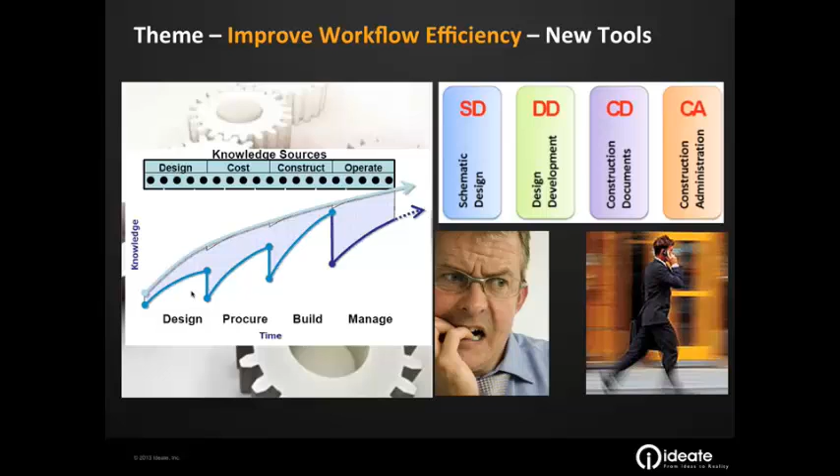So the notion is how to improve workflow efficiency in the work you do right now. Right now firms are struggling with how to connect all the dots in their workflow. Probably your current workflow has several different products. Maybe you're using SketchUp for your early part of the design. Maybe you have issues about how to take care of early marketing stuff that you have to do, and then how does it work in the field. We'll be talking about those kind of items today.

As part of the 2014 suites, Autodesk has added additional products. This is a PDF from the Autodesk website with some modifications. I cut off the suites that don't deal with the AEC industry, and specifically I'll be talking about two additional products that come in.

As part of the Building Design Suite, which is probably what most of you have, you get two products I've highlighted in red: Autodesk ReCap and Autodesk InfraWorks. If you have Infrastructure Design Suite, you get them in another kind of package. These all come as part of the subscription and suite work you do.

So the first key takeaway is, how many of you understand that you have an Autodesk login that you use? Everybody know that? Some don't. Every user can either get an Autodesk login or have one already.

A lot of what I'm going to be talking about has either a cloud-based element or a file storage area, and the place to get this information and deposit it is through Autodesk 360. There is no cost to you. They take a relatively minimal amount of information, and that gets you the sign-in portion of it. So if you don't have a login, it's probably best to get one today.

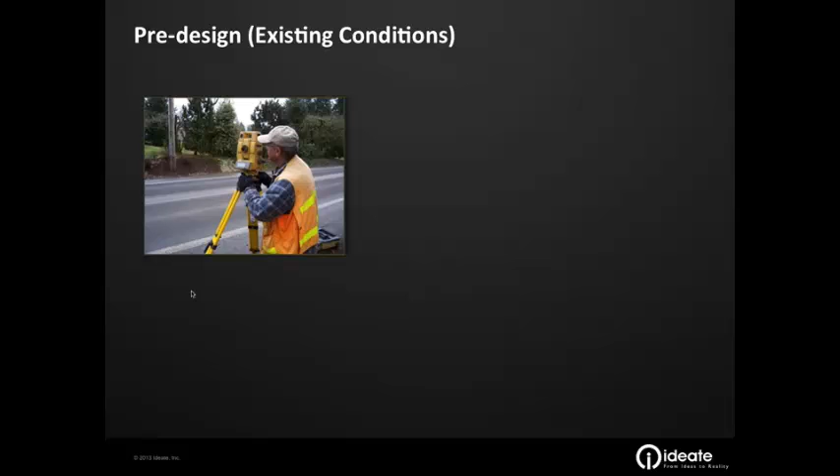Some of you may be waiting for a surveyor to do the work for you, meaning you wait till the surveyor gives you all the work, and maybe use SketchUp or hand drawings, then when you get the survey information, bring that into Revit and move forward. Maybe some of you are using a tape measure and existing scenarios, and for those of us over a certain age, maybe you're putting that information on in red lines and trying to transfer it over.

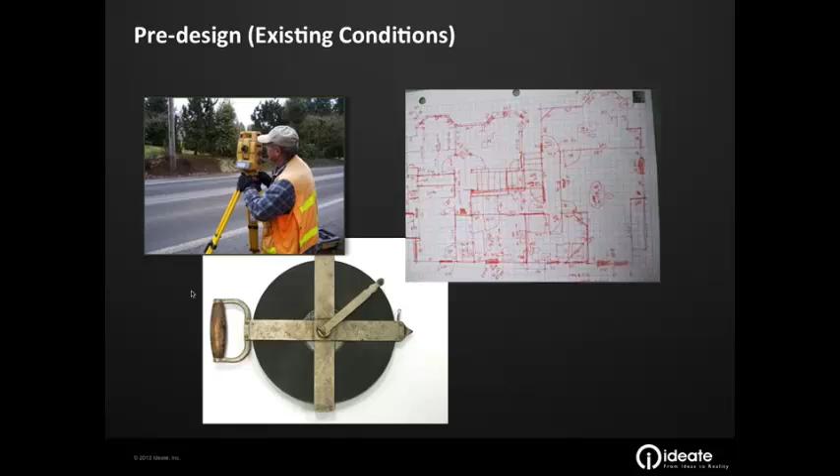That's a fairly inefficient workflow overall, because it doesn't allow you to carry that data forward easily and well.

So Autodesk has looked at that and said, let's see how we can help customers communicate and visualize better in the existing context they have.

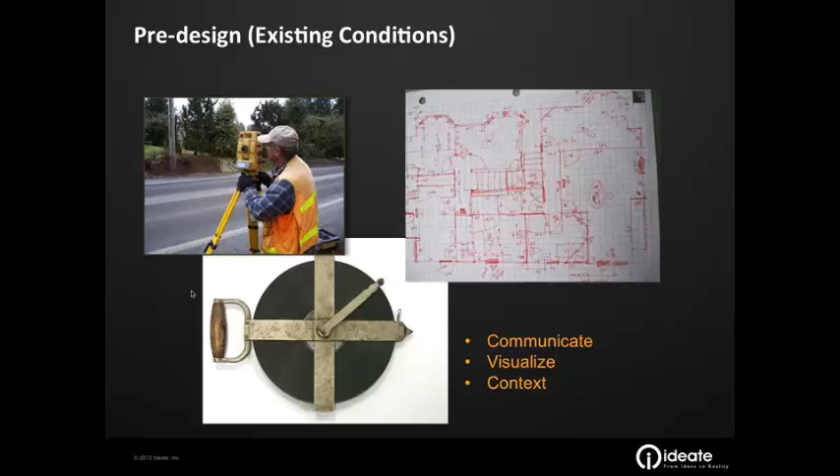A product that has just come out as part of your subscription benefits, and some are free, is called Autodesk ReCap. Autodesk bought this technology about a year ago. They've included it in Revit to help with scan data coming in, but there are some other additional benefits I want to talk about, because not everybody's going to get scan data.

We're going to talk about two aspects: the scan data and items you don't need with scans. The part that is ReCap Photo is where you can use your digital camera to take pictures of a project or site and then bring that scan data in directly without the use of a third-party vendor. I've got a short video, about 2 or 3 minutes, done by Autodesk that illustrates this process in the photo way.

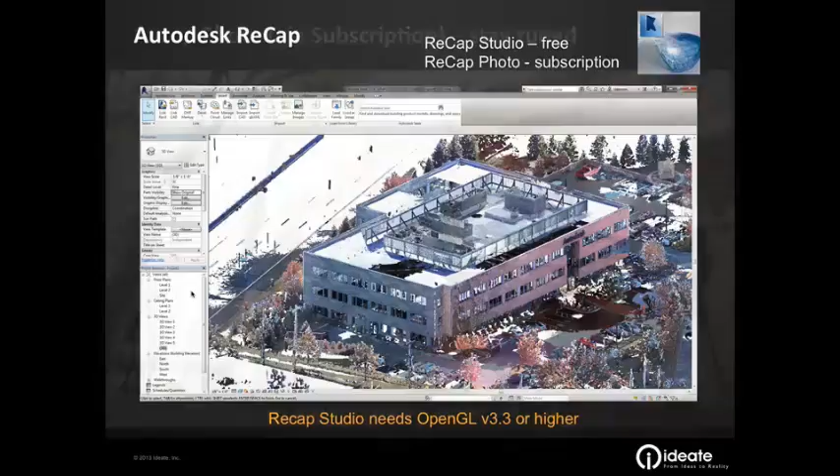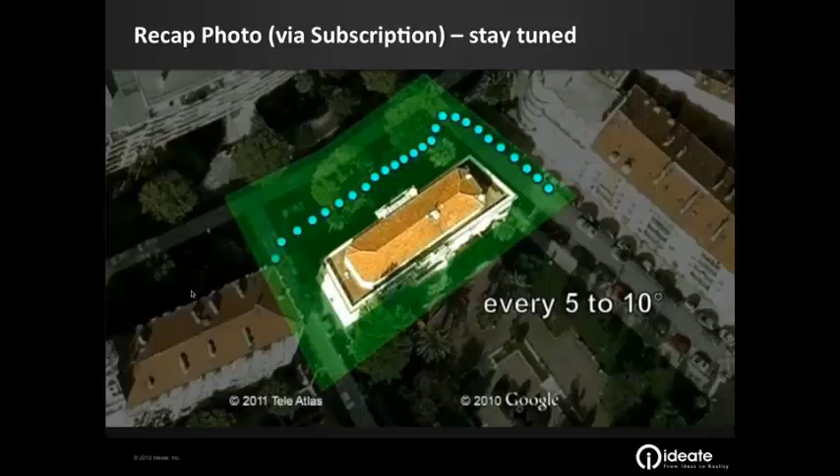In the case of a building, a first recommendation is to schedule your shot using a Google Earth view. This will help to check the possibility to access the various viewpoints. You'll need to take a picture every 5 to 10 degrees roughly, so about 40 to 50 pictures if you want to get the full 360 degrees of the building.

Shooting from street level, make sure to select the right spots. Avoid shooting with moving objects in front, or foreground trees that would hide your building. Be careful also to avoid underexposed or overexposed photos. Do not zoom in too much. The best camera for street-level pictures is a digital SLR equipped with a wide-angle lens. A 10mm lens is a perfect tool.

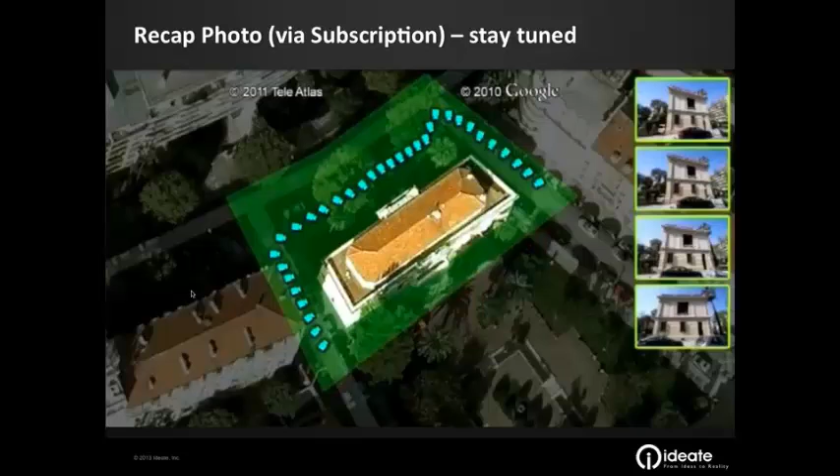You can then simply walk around and stop every few meters to shoot the pictures. When moving around, make sure to shoot enough pictures to ensure a good overlap between each picture. Autodesk ReCap Photo will do a good job if there's good visual continuity between each viewpoint. It's always better if you can capture most of the building in each photo. If you have the chance to shoot additional pictures from high viewpoints, such as from neighboring buildings, please do.

If you use a compact camera, you can artificially create wide-angle viewpoints as well. In every location where you stand, simply rotate the camera around yourself, shooting several overlapping photos to simulate a wide-angle lens to cover the entire building from each location. Make sure that the photos you shoot from each standing point overlap by at least 50%.

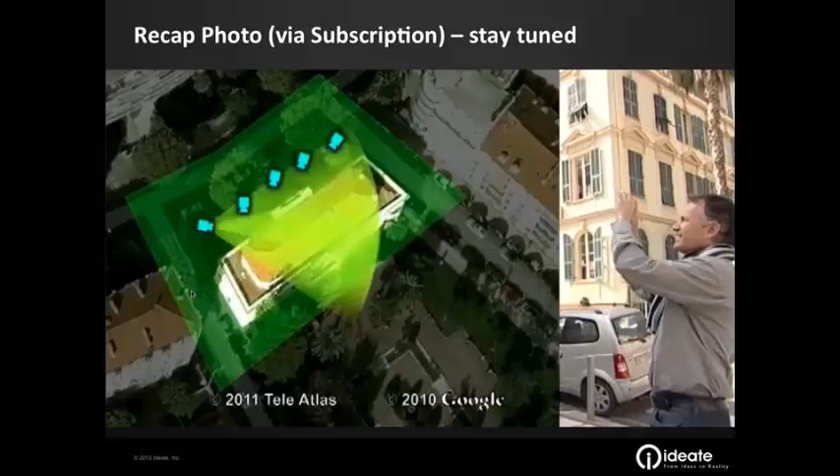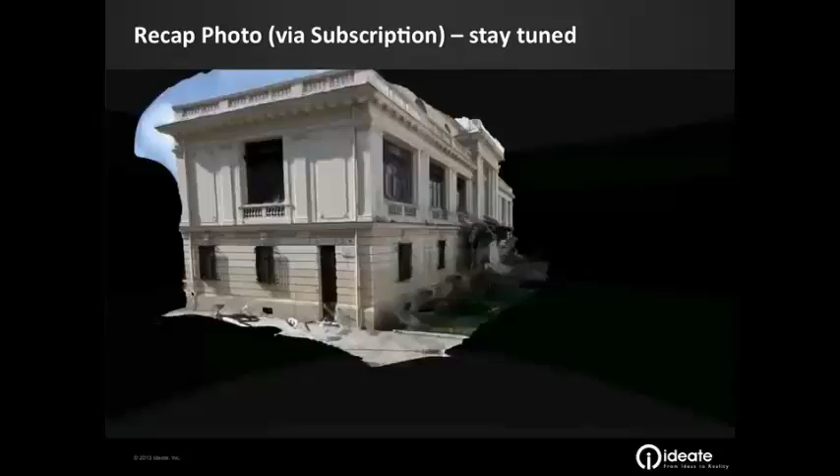ReCap Photo will then create the photo-textured 3D model for you. You can add close-ups if you want to get more details on some interesting parts of the building. In this case, shoot again several pictures around these parts. The computed 3D geometry will have a higher density in such parts.

One last step: don't forget to measure one or several reference distances if you want to further scale your 3D scene inside ReCap Photo. Thanks for using Autodesk ReCap Photo.

So what that video shows you is that you'll be able to take either a DSLR camera or just your iPhone or a pocket camera and take pictures of existing conditions. That doesn't necessarily mean it's only for existing buildings. It could be infill projects where you're trying to understand what the buildings are on each side, or maybe you're doing a remodeling. So you've got several options.

Yes? So this looks like 123D Catch, except it's via subscription. Is it better than 123D Catch? So the question was, it looks like it's similar to 123D Catch, and is it better than that?

It has some elements that are, but the benefit comes near the end. When I get to the next slide you'll hear a little more, in which I'm going to be able to take that scan data and bring it into another editor piece that allows me to call up and edit the scan data and get it down to the right amount of stuff.

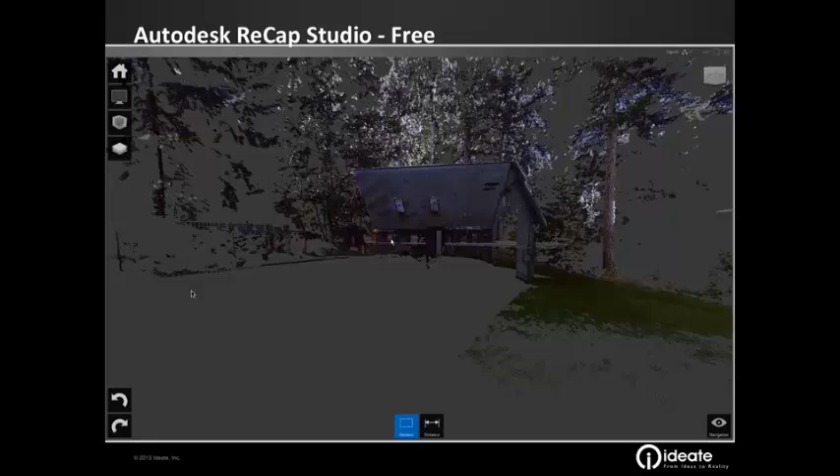There's many others. The other part of this is the Studio piece, in which I'm going to be able to bring that scan data, whether it comes from this photo method or from Leica survey information - doesn't matter which way I get it. I can bring it in. This is an actual scan data item done with Leica and brought into ReCap Studio. It allows me to quickly put it all together, because usually there's multiple files when you deal with Leica data, in the same way as the multiple JPGs you have through the photo side.

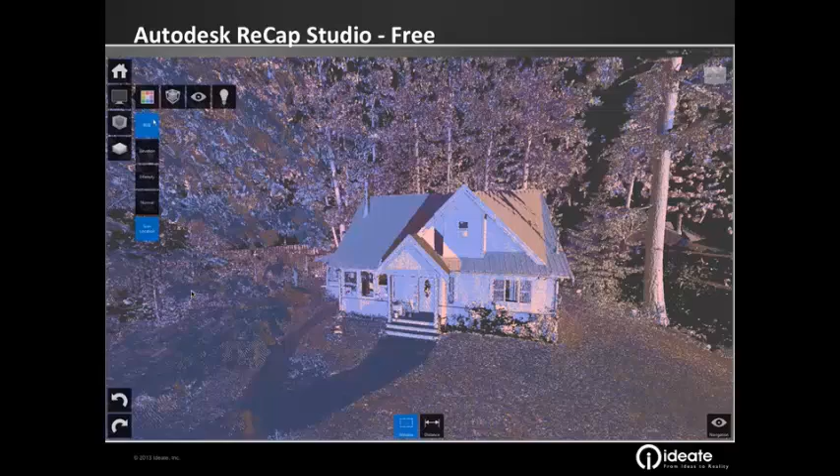Then I'm also able to come in and do some inquiry. What I mean is we're going to be able to do some scanned measurements, so I can see if I've measured that to be a certain distance in the field, does it equal? It gets to validate the information.

In this particular case, it gives me some information. I don't know if any of you have done a residential remodel and wondered about the roof pitch. Had that on my own house. Here's an example where I could have scanned it and it would have told me this roof is a 12 and 12 roof. So if I wanted to extend that porch, I now know the pitch data is 12 and 12 without having to scramble up on the roof.

So you get to do a lot of inquiry upon the scan data to see if it works for you. You also get an opportunity to add notes, so it can actually embed notes like 'please check this dimension again.' But one of the key benefits I've seen in ReCap Studio is the ability to get rid of the scanned information that you no longer need.

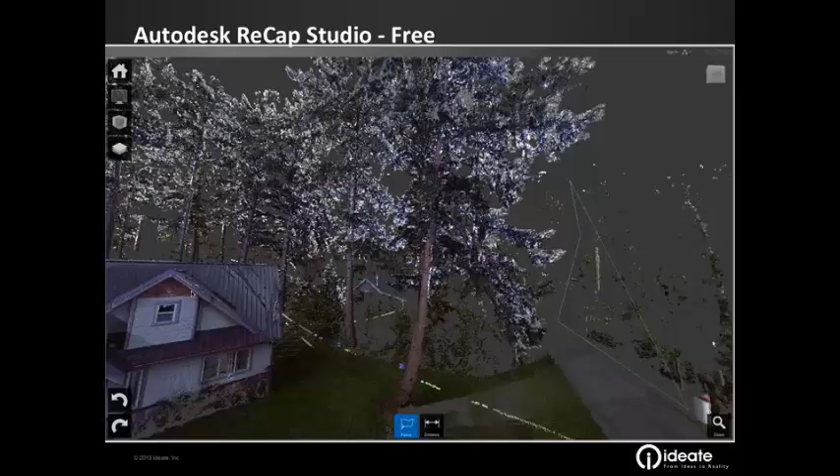In this case, we're using what I call desktop publishing, or Photoshop-like editing, where I'm lassoing this portion of the scan data, which is on the neighbor's property, and I can just get rid of it. So it reduces the size. Maybe I want the trees, maybe I don't want the trees. I can come in and cut and leave in what I want.

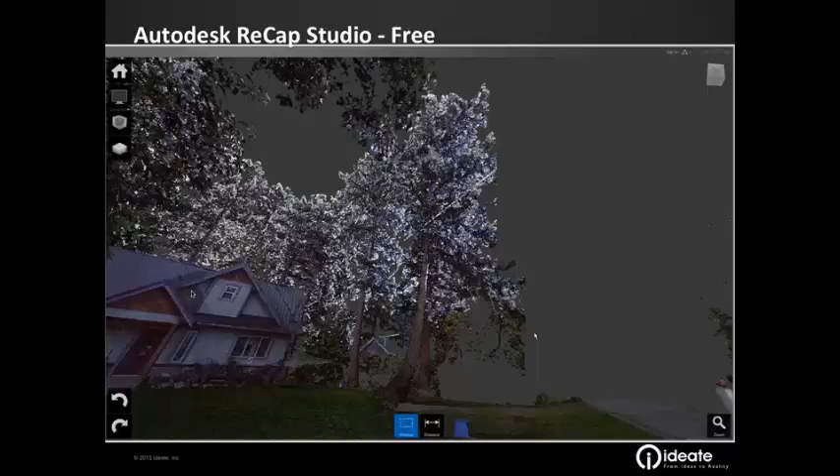I'll show you the workflow in just a second, how that would work. So the key takeaway about this technology is you get to deal with point cloud information without scanning, and if you do have scanning, you get to do the post-processing in a better way.

All right, let's talk for a second about the workflow of how to get that information from ReCap, that scanned information, into Revit, which is where I want to be doing my work. This is a screen capture from ReCap, and as you can see, I've highlighted the blue export, and now I save it out in the file format to the RCP format.

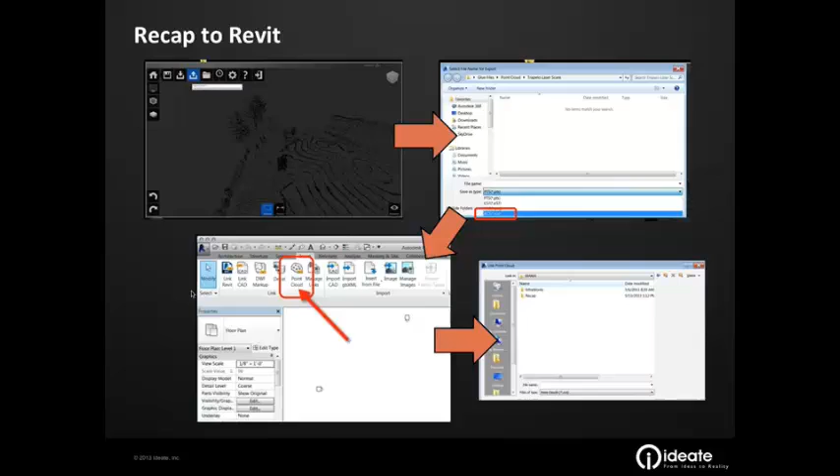In Revit, it's simply insert point cloud, and that brings up this dialog box, and in the drop-down it also has RCP. So then I bring it into Revit, and I can work from it there. It's a very easy workflow, and the key benefit is that you're able to take existing conditions and bring them into Revit, and that data continues to live in a very easy methodology.

Any questions about ReCap that I can answer? Yes, ma'am. How accurate is it?

Oh, it's taking from point data. So in ReCap Studio, you've got to be fairly specific about where you press the button, so you'd have to zoom in to find that corner of those two posts. But it would be a good way of validating some information.

I don't know if you've ever done field measurements and thought, I wish I would have taken that piece of information, and you didn't. What do you have to do then? Go back out to the site. And what do we do if we can't go back out to the site? We assume -- I say fake it, but assume's better. And does that assumption usually come back to bite us later on? Nah, never. So this is a way to validate it.

I wouldn't use it in lieu of a key measurement. So if you knew those posts had to be 8 feet apart, I'd probably still take the field measurement. It's still going to be better.

Yes, sir? What kind of point data files do you accept? As far as point data, there's a lot of different Leica and that kind of information that goes into it. It has to be brought in and then changed over to an RCP. The reason is that's the technology Autodesk purchased that allows us, when we take it into Revit, to rotate it nicely. If you've used previous scan data in Revit, you've noticed it's been -- can I use the word clunky and get by with that phrase? Very clunky and hard to use. So they bought the technology which takes the scan data and processes it in a better way, so it's a different file extension. But you'll be able to put your existing scan data into ReCap Studio and then create an RCP file from there.

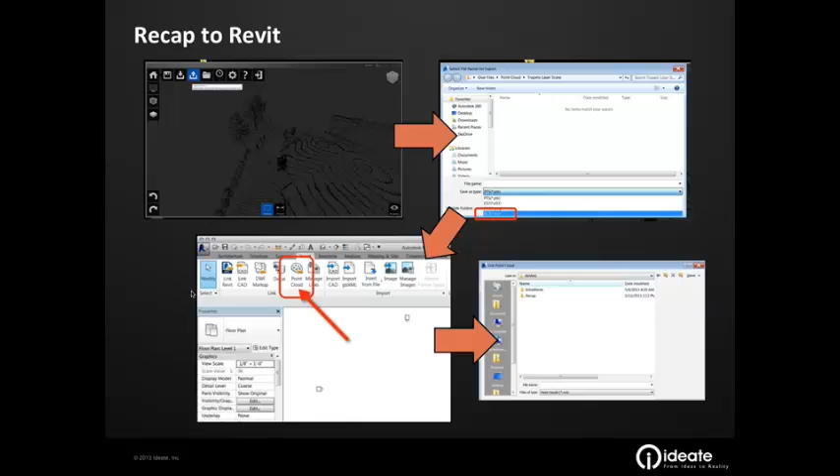All right, so let's talk about the next piece of the pre-design work, which I'm calling contextual storytelling. That's a big word that really means there are times in the pre-design work where we in the design industry must explain to others - stakeholders is the word that gets used. Stakeholders is anybody that's interested in the project, whether they have knowledge of design work or not - planning commissions, neighborhood groups, a whole bunch of things. And right now, this is kind of the workflow.

We go and take sketches and stand in front of groups, and we may have angry neighbors telling us no, no, no, and we're trying to explain our design maybe in a rendering, maybe in plans, maybe through words. All of those processes can have their problems, because I think we'd all agree, if we step aside for a moment, that most of the world doesn't understand architectural drawings.

They may like the colors, they may look at the rendering and say how nice, but they don't understand how it sits. So the common question I used to get in planning commissions is, how is your building going to look from my bedroom window? Anybody get that question or a variation thereof? I see some smiles, so you've all had that once. And how do you answer that question? Oh, it'll look great.

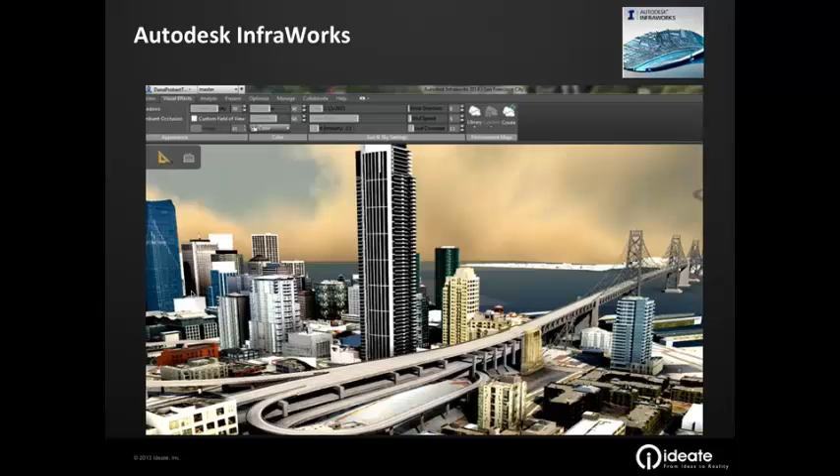It's called Autodesk InfraWorks. It's included as part of your suites under the Ultimate edition. What it does best is provide contextual storytelling, with the additional ability of adding data to a model. That data could be anything from population density in the area you're dealing with to locations of significant infrastructure, such as hospitals or schools. When you're dealing with how close a development is to schools, you can add these other data sources in and create a story that's easy to understand by anybody.

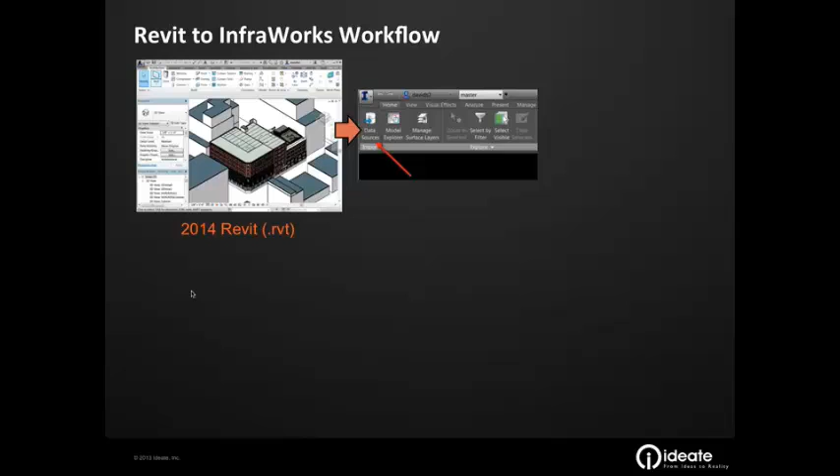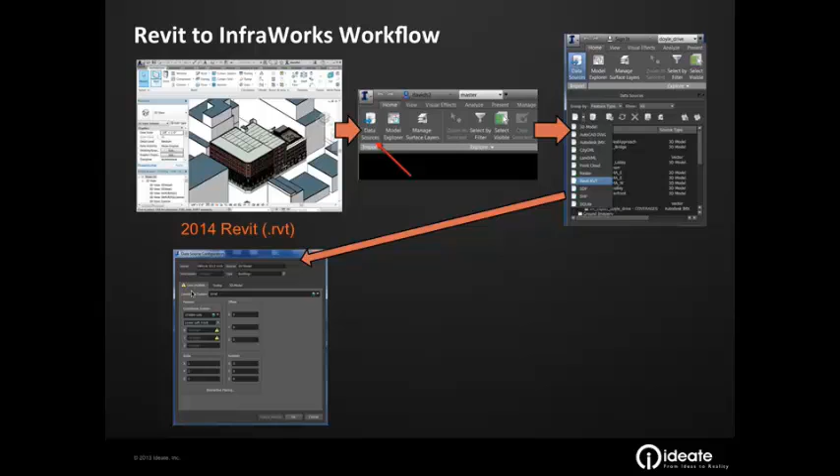Let's talk about the workflow. This works with 2014 Revit RVT files. In InfraWorks, you just click on the data source and you're able to add a Revit RVT directly. You place it, and then you can take this Revit RVT file and put it into InfraWorks. So the question becomes, how does that happen?

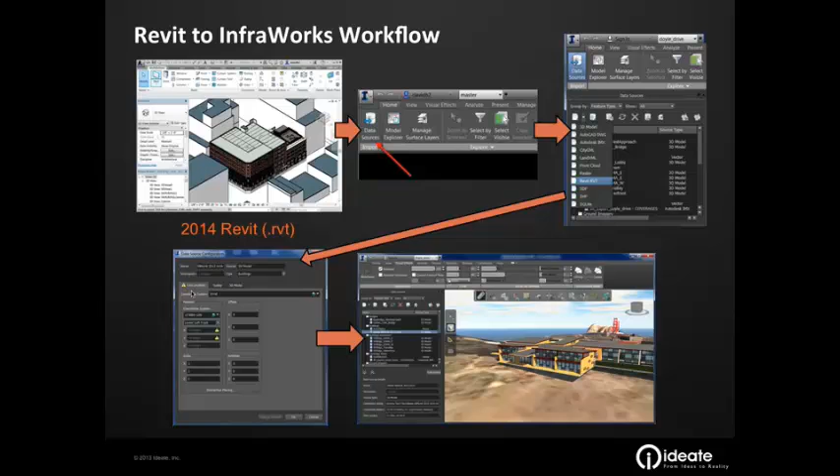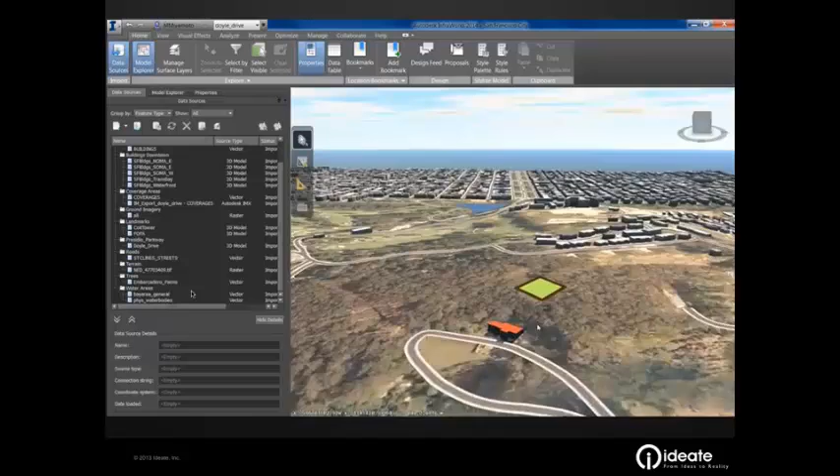This is a quick example of the city of San Francisco, modeled up by Autodesk from a lot of different sources. You wouldn't need to model this big of a city. The workflow goes like this: I've got a project, I'm putting it on this site near the bay, and I want to see how the site looks when I add my Revit model, and what I can see from it. So we're working through the process of attaching the Revit model.

We get to place it dynamically in this particular example. In fact, here's scan data I had before, so you can also bring in scan data additionally.

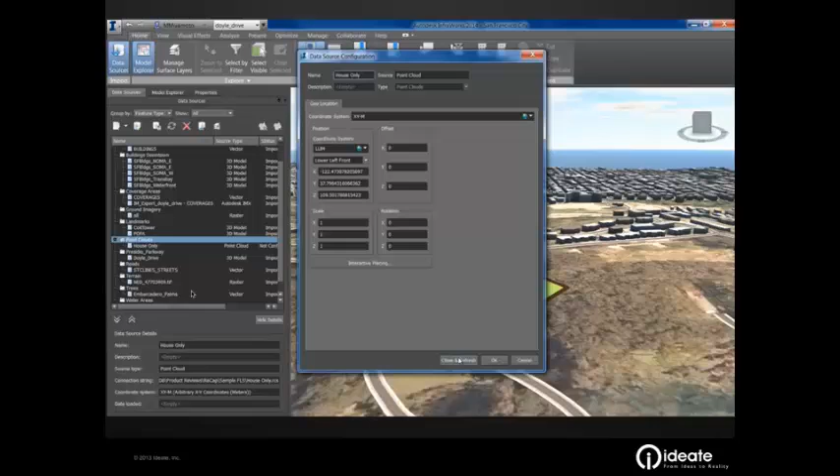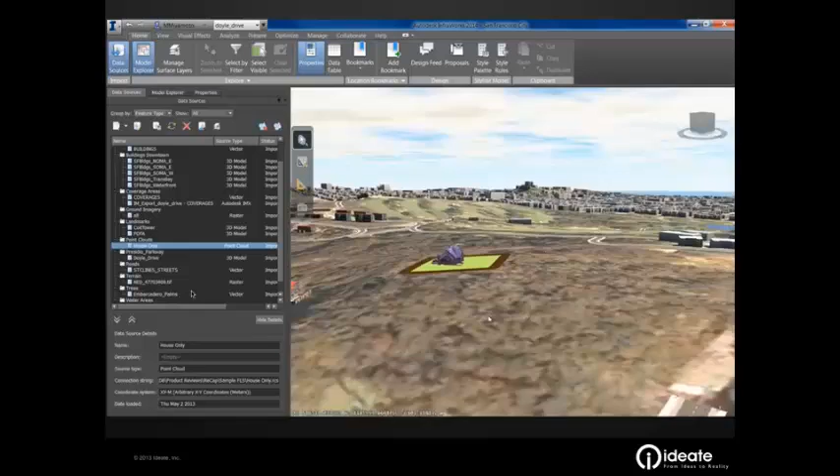And so it places it, and now imagine if you were one of the stakeholders—maybe the owner, or maybe the historical preservation company or district involved in this. How would that project look, and what could I see from it? I've been able to take scan data, bring it into InfraWorks, take existing data including Google Maps and other sources, bring it in, and now talk about it in a way that stakeholders can really understand very simply. It's part of your suites right now, and you're able to use it.

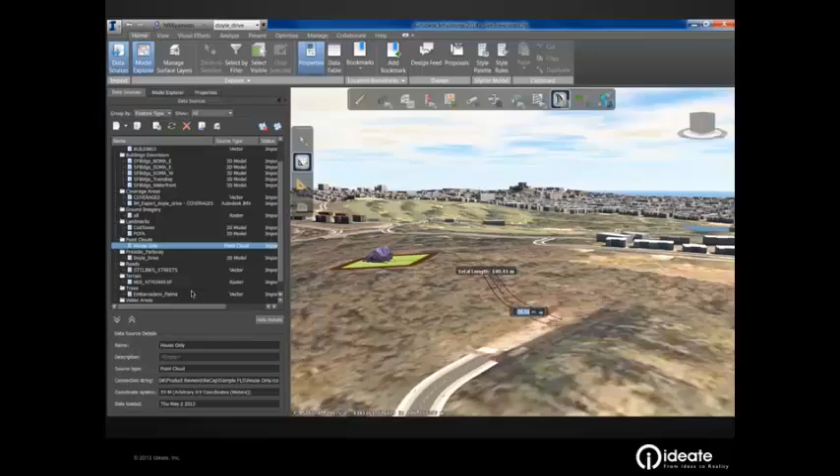Additionally, I have my iPad here, which I'll use later on. InfraWorks is part of the apps included on the iPad, so now I can actually take it out to neighborhood groups, present it in front of smaller neighborhood groups, and start to show it.

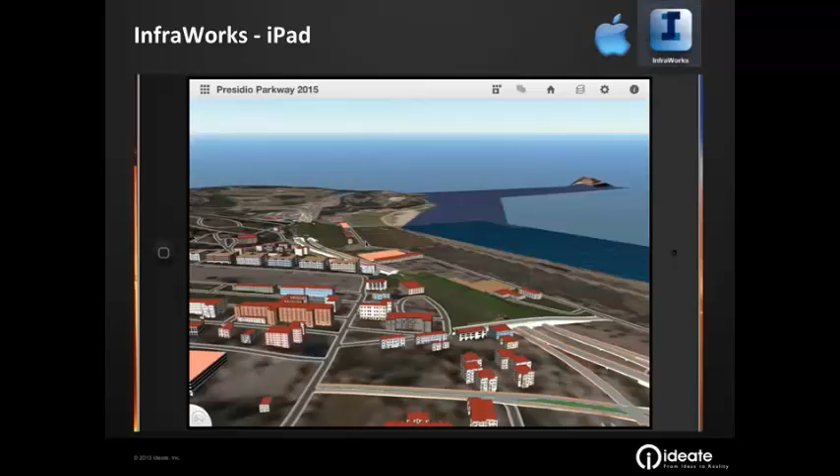So the key takeaway about storytelling here for users interested in InfraWorks is it has several key aspects that I think are really important. It allows you to get design feed input, so you can get stakeholder input—similar to a meetup, where you put some questions out. Here, the neighbors can actually tell you what their problems are earlier in the process. You can do multiple proposals, and you can also get more than one data source.

Any questions about InfraWorks that you might have? It's an interesting technology, but it's not for every firm. It's for firms dealing with urban planning or projects that involve a lot of stakeholder input. It's a technology I invite you to start looking at.

Now let's go to the other bracketed end of this, and let's talk about post-design. This is where I think the most exciting work is being done. How presently is your post-design work being done? When you go out to the job site and have questions from the contractor, do you have them scribbled on a page, taking a big roll of drawings out there, then running back to the office hoping somebody can...

...deal with them. Autodesk has looked at this, and again it comes back to the three issues of communication, visualization, and collaboration. There's a methodology where tablets are being used presently on job sites, and how can the information we create in the pre-design and design phase and working drawing stage be pushed out to the post-design phase.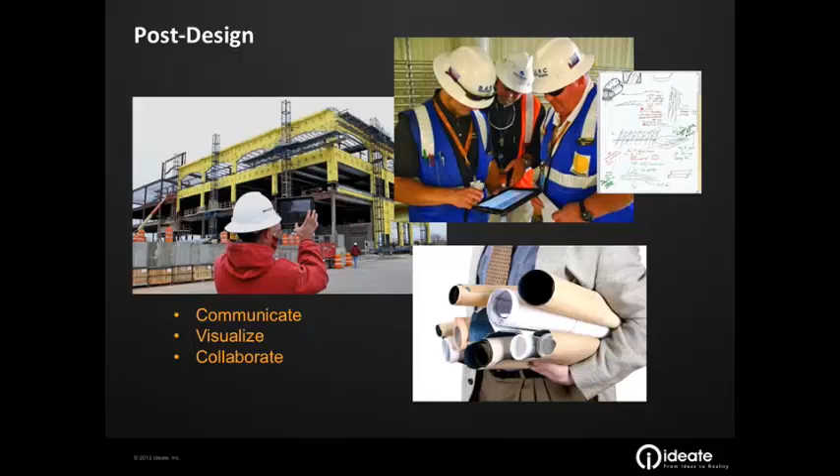So Autodesk has bought a product called Horizontal Glue that they've renamed Autodesk BIM 360 Glue. Some of you may have been at the Scott Davis presentation two months ago, where he tried to show this. I'll try not to have my laptop bomb like his did.

He was talking about this particular way you're going to be able to import 50 different file types. This is at the workstation level that we're talking about. And then we're going to be able to collaborate in a way without a BIM manager.

BIM managers right now have to do all the collaboration. When a new set of files come in from the design process or post-design process, the BIM manager of some firm, usually the architect, maybe the general contractor, has to put all these files together and send them back out.

What BIM 360 Glue allows us to do is, through Autodesk 360, upload all our files to the cloud with some minimum setup. We're then able to do clash detection, and everybody gets clash detection immediately. As we move forward, we're able to share those models as we continue to improve on the design process via clash.

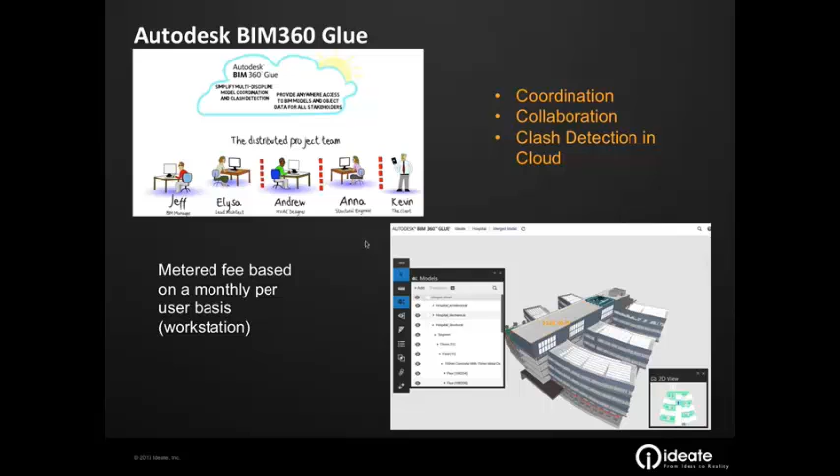All right, so now comes the fun part. Let me come out of here.

So this is the BIM 360 Glue website, in which there's an administrator involved, and that administrator, like you would imagine in Buzzsaw, would be able to allow certain people to access certain projects. You can have multiple projects on the same site, and as you can see here, I have two particular projects that I've put up here. So let's look at this one.

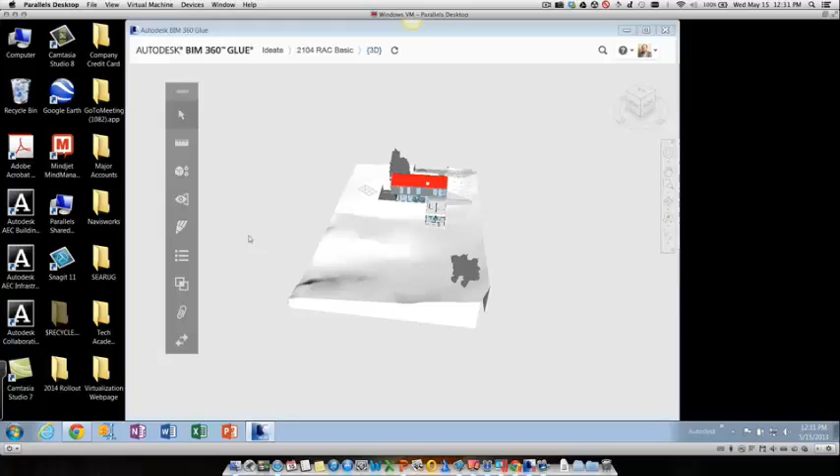Right, so this is running over an internet connection back to the Autodesk cloud. As you can see from the interface, it's a very easy interface to go through. There's not a lot of ribbons and panels. I'm able to use common Autodesk tools like the cube to swing this around - some of you may be better at doing these cubes than I am, trust me. I can use my mouse to zoom in. Let me tilt this down a little bit.

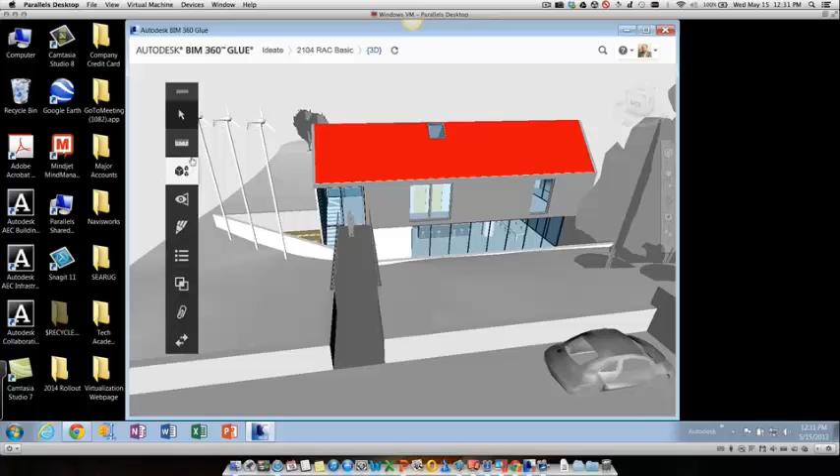There we go. So let's suppose as the lead architect on this, I'm concerned after all was said and done that the structural engineer hadn't given me enough of a pathway. So I can measure from point to point, just like the lady was asking me about preciseness. Here in BIM 360 Glue, if I zoom in just a little farther, it actually finds that corner for me and gives me dimensions. Whether that's good or wrong is up to me.

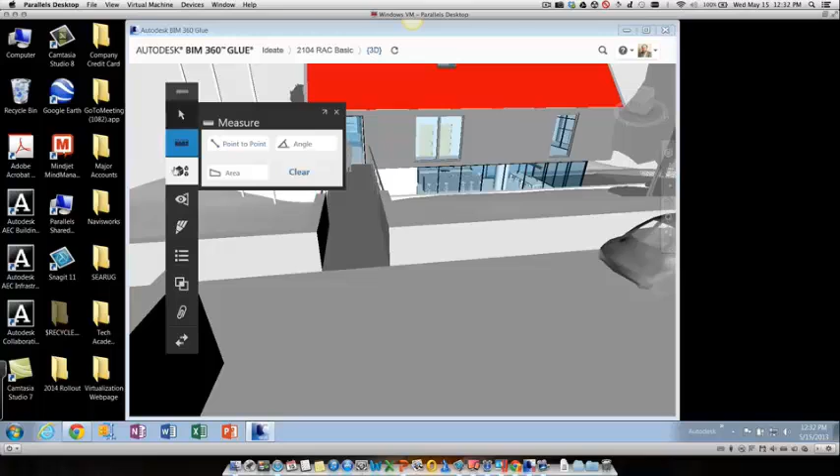I'm also able to look at the different models, any of the different views - there may not be any views in this particular one. I'm able to look at the activities that have gone on, who's done what. People have asked me for a long time, I want to know who's involved with the model, when, and how. I've been the only one in this so far.

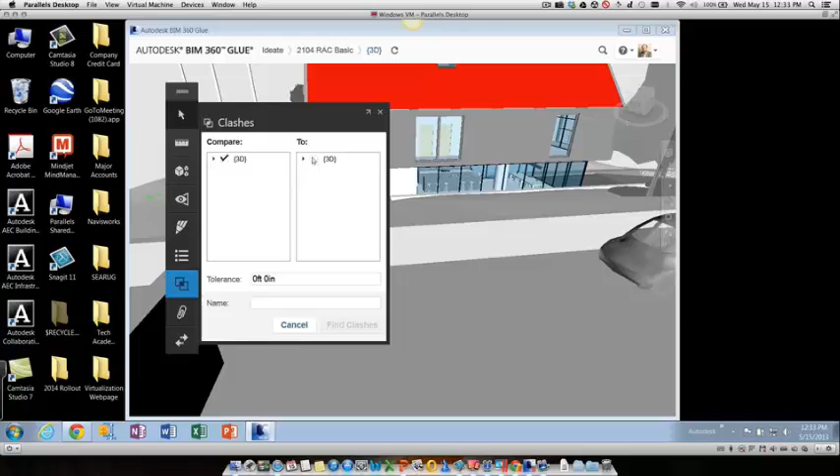And then I can also do attachments, and I can also do clashes based upon multiple models. So if there was more than one model in here, that would be fine. Anybody familiar with Navisworks? This works in a very similar methodology to Navisworks.

Now this is all being sent up to the cloud, so I could be doing this from home because I've got a meeting, and then it gives me all these clashes that I can deal with. I can group them, very similar to Navisworks in that way.

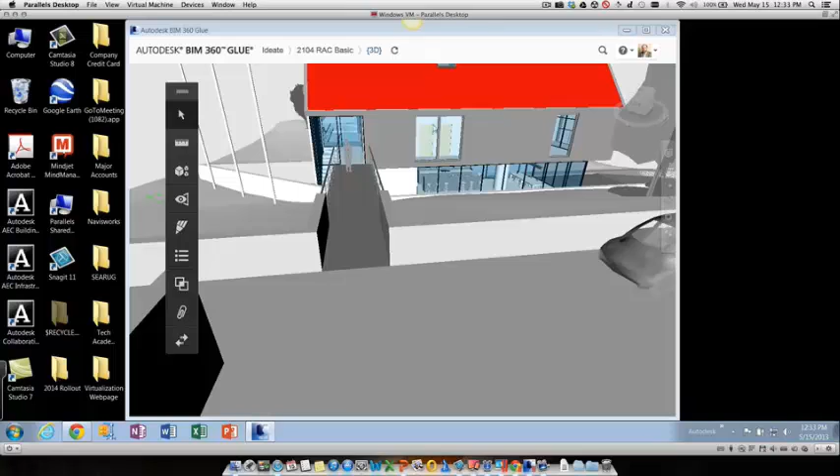I can also do markups, if I didn't mention that before. I can also look at a particular element and get the view properties of it. So one of the key aspects you need to understand about Glue is it's actually creating DWFs for us, and that's what it's doing to find this information.

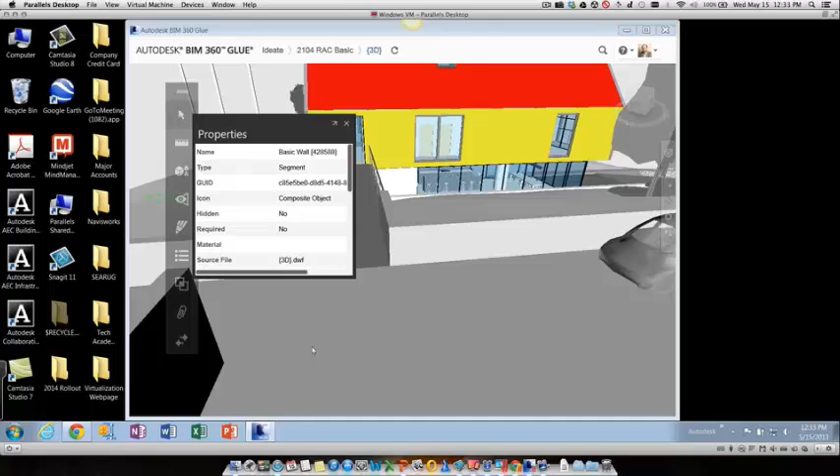So I get asked the question about how does that work within Revit. Let me - I didn't load this up before, so it'll take me just a second to load up Revit.

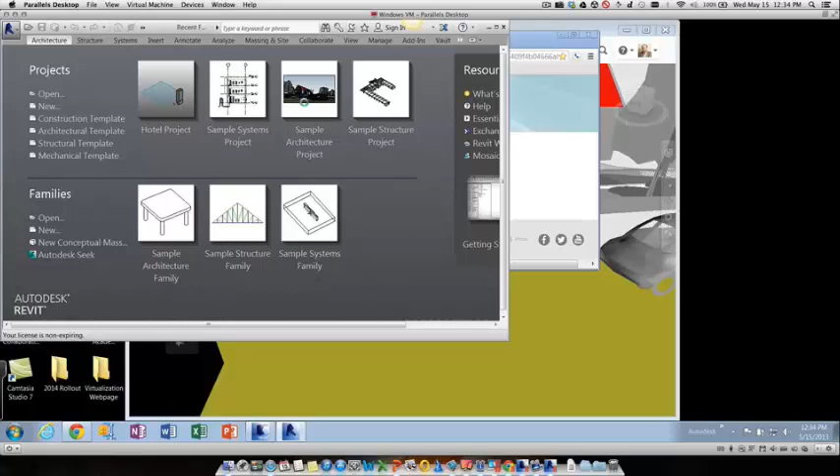Let me just load this one up. So maybe I'm part of an integrated team, and there's interest in me loading up the latest model here. I just go into add-ins, and here it is as Glue. It asks me, of course, again, to sign in because it's pushing it to the cloud.

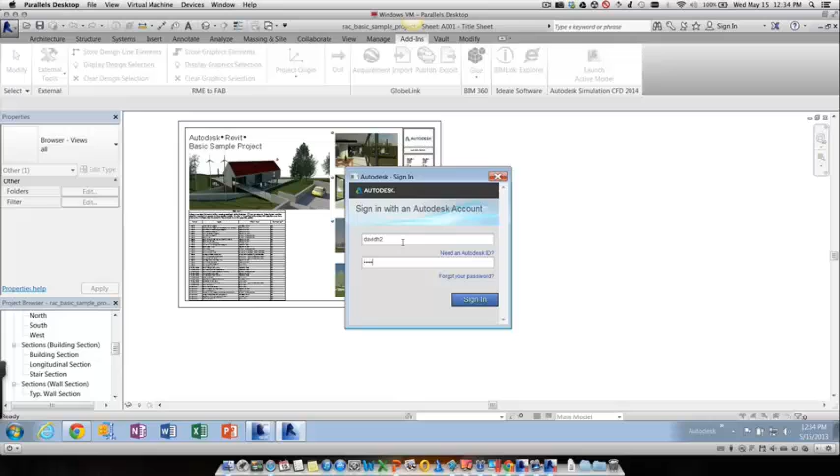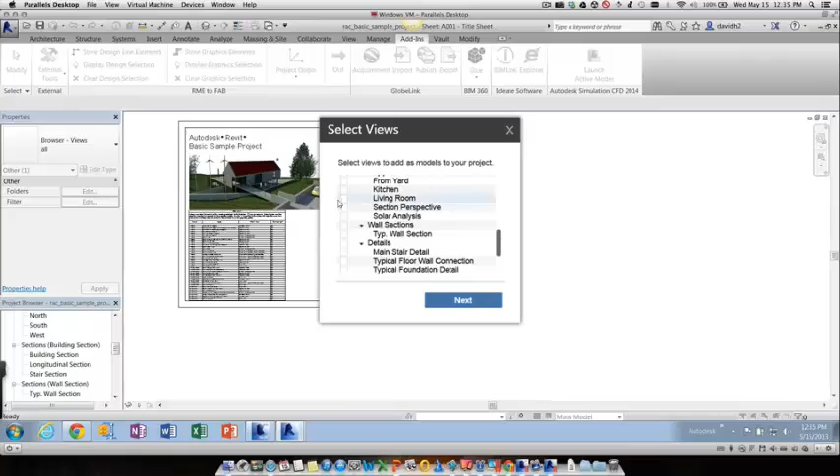All right. Now it asks me to select which views I want, so I can either take additional views. Maybe I want to, that's the one they're interested in today. And now it's pushing it up. Oops, let's just select a host.

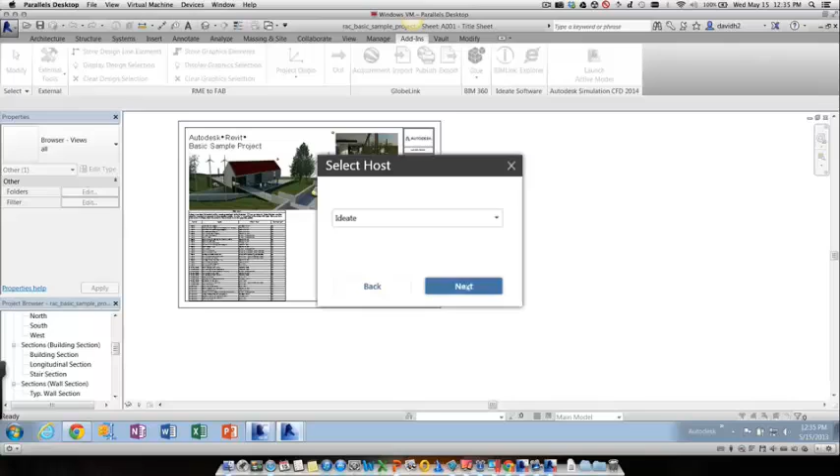Which project do I want to stick it into? And I can create folders, which I don't need to do today. So I have the ability to get that information.

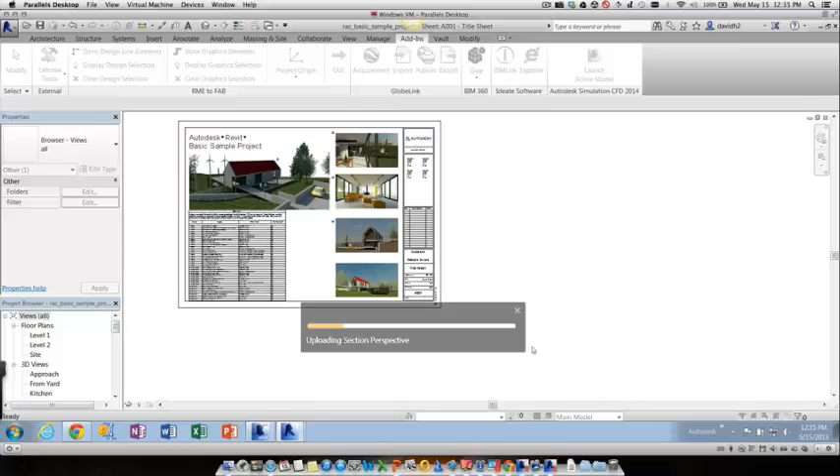This is all done in a way that I don't have to have a great big meeting, and it gets to democratize, as I call it, the BIM coordination process. The democratization I'm talking about is twofold: everybody gets access to all the information in real time, and everybody else knows what information I'm pushing up through the activities side.

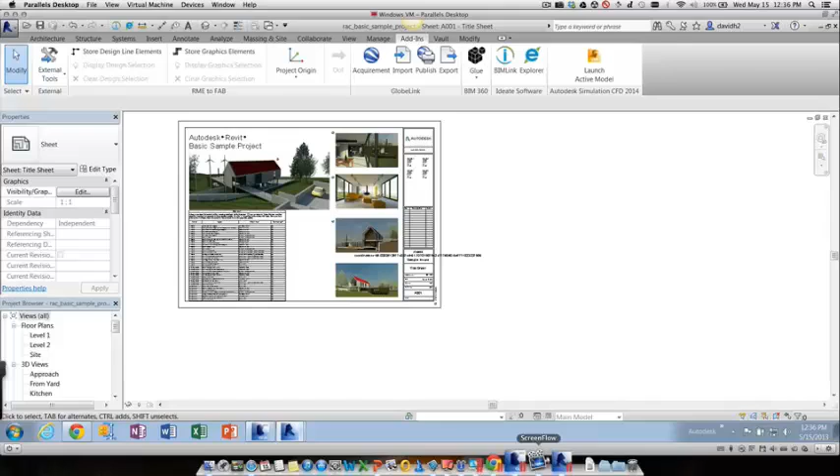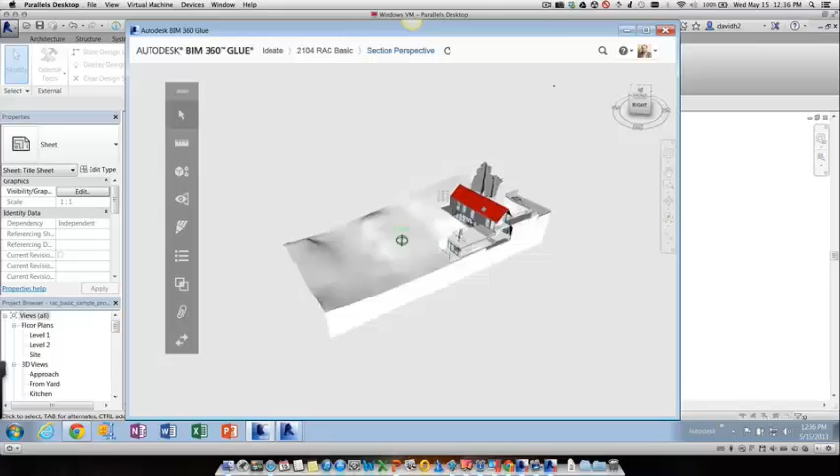So it allows you easily to find that. And now let me come back into here. And there you can see automatically it's there. And now maybe I'm the owner in this particular situation, and I want to see how this looks. I can do it in that way. All right, then additionally, come back to here.

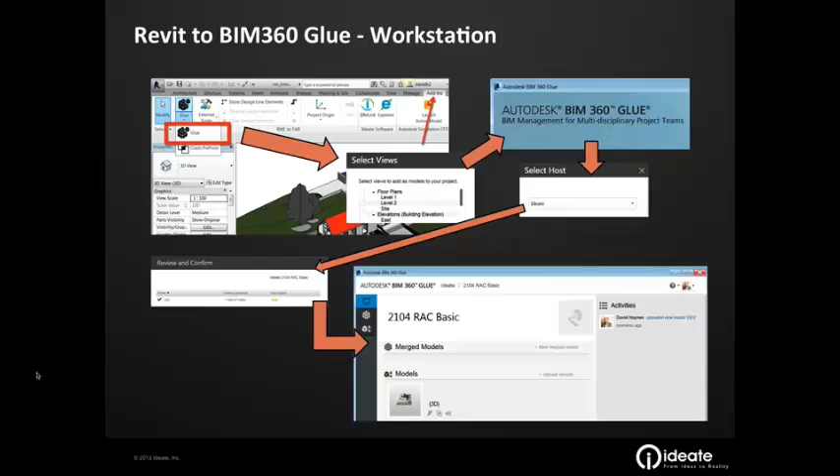So I just sort of walked you through this workflow, which is the workflow we just went through. So now what I'd like to do is show you how this might work, and this is where the fun begins.

This is where Scott ran into his problem. All right, there it is. So here it is on my iPad, and here are all the relevant Autodesk apps that are available. Not all of them, but the ones I've downloaded. As you can see, InfraWorks is on there, but I want to go to BIM 360 Glue. Here it loads up exactly what I had before.

All I would need to have is an internet connection. However, I can do this offline also. So if it's already been downloaded at the office, I could go out on the job site and it'll allow for an offline model to be included.

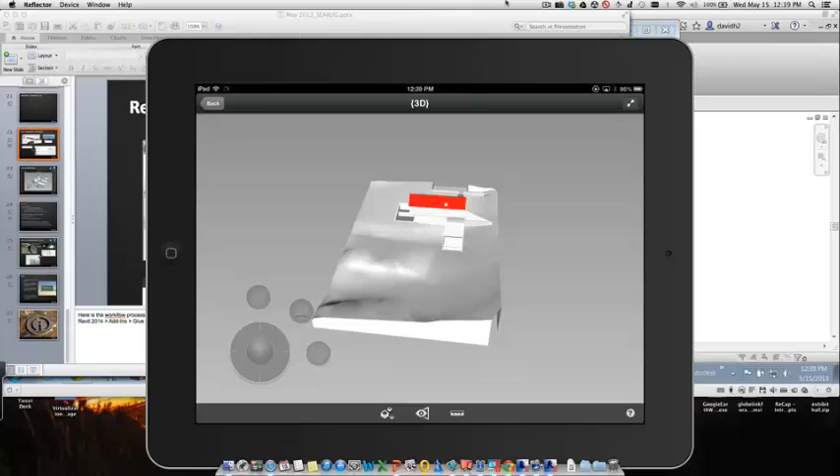Let's make sure I have... I was in the wrong one. There we go. There we are. Here's that same model. I can use the classic Apple kind of uses of...

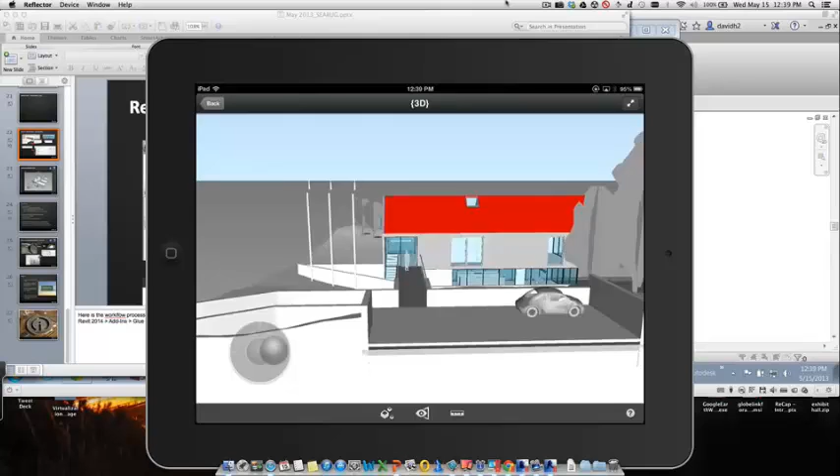Plus, you'll see right down in the lower left-hand corner, I can use this, what I call a joystick, to move around the model. So they've really improved the moving of it. I can also touch on any part and do several things with it, like find out information, so if somebody wants to know what that's about, I can.

Maybe I want to hide it to see what's behind it. I can certainly do that.

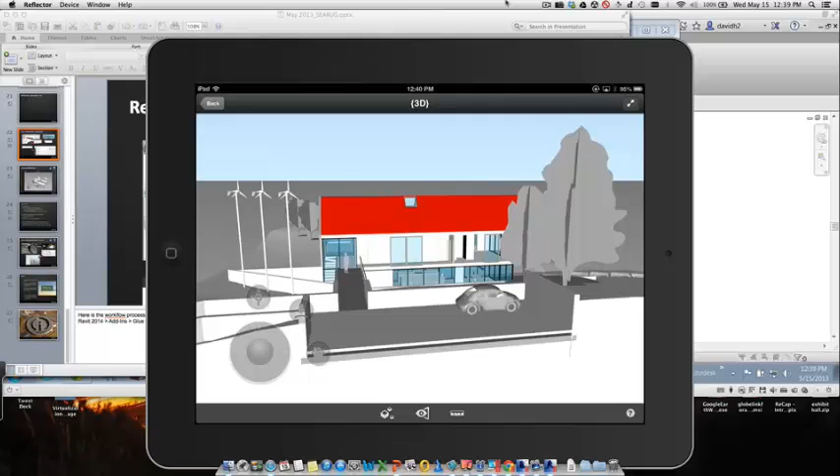But one of the things I find most fascinating is, let me lift up the screen here, so let's suppose I'm actually on the job site and I'm wanting to see what the building will eventually look like, or I want to discuss with the owner some questions. I can lift up the iPad and start to use the gyroscope within it in that way. Very cool technology in the way that I can start to look at things easier.

Questions about what I've shown you regarding BIM 360 Glue?

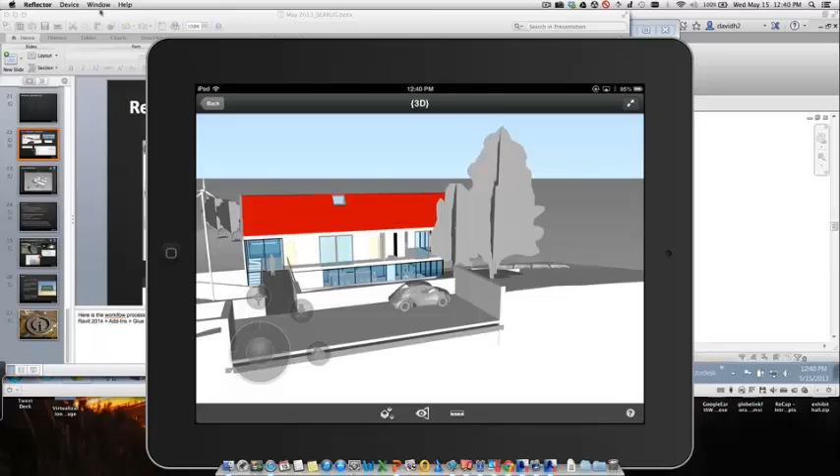That's a free app. The app is a free app. The workstation side is a metered service, and so the way to get products up to the app is through the workstation.

All right. Sorry, one more time with the question, I keep dealing with my technology. Do you use cloud points to upload it?

How does it work? Do I use cloud points? Cloud credits, yeah. No, not presently. So right now, while cloud credits are being discussed, I want to adjust what Brian said slightly: cloud credits are presently being used for two types of processes. One is rendering, which now requires cloud credits, and some of the simulation and structural simulation work requires cloud credits at this time. So this doesn't...

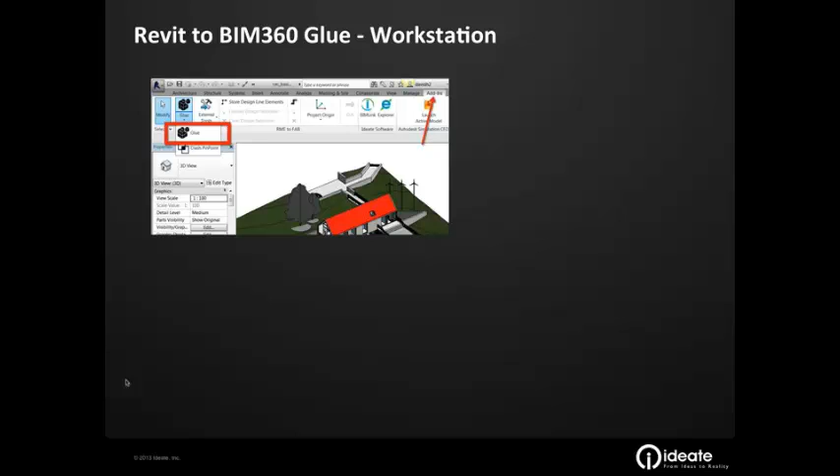Gotta love that. Let me do the following. There we go. And we talked about this.

So let's finish up by talking about the three workflows. With Autodesk ReCap, you get an end-to-end workflow to increase efficiency by documenting your real-world information, and you can export to Revit to continue your work. The focus is on as-built modeling, sense of place, and urban infill. InfraWorks is really about storytelling, and you can import from Revit, and also export from InfraWorks to Civil 3D if you're wanting to deal with road design. And lastly, BIM 360 Glue, which reduces the problem in the communication loop, giving you multidisciplinary coordination and just-in-time job site information.

Before I finish, I want to talk about one last technology I think is really coming on strong: iFormit, based on the iPad. This really gives you the ability to do mass modeling inside of iFormit. Then you're able to take that information through Autodesk 360 and bring it into Revit, keeping that information intact. This product is moving fast in the Autodesk world—it's now in version 2, with version 3 coming, heading towards a version where you'll be able to round-trip the information. So for those of you using SketchUp as your main starting point, this is a technology to pay attention to, because it keeps the data going all the way through so much better.

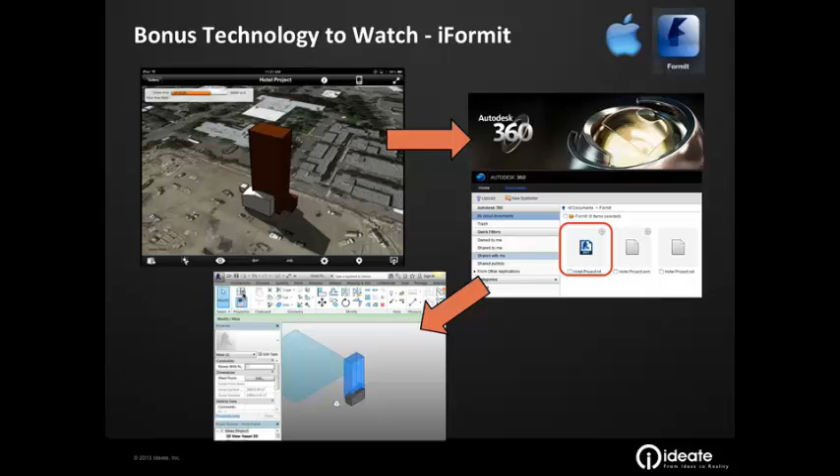So what does the future hold? At Ideate, we believe it's all about the data, and that data is king. Your AE team can either be an integrator of disparate data, models, and stakeholders—with architects being integrated into the facility management side of data integration, we see a lot of promise in that—or AEC firms can simply be left as dictators of style and stampers of documentation for local building departments. I believe, as an architect, we're at a crossroads in our profession where we can either grab hold of what the future brings, which is all about the data, or retreat back into our world of sketches and stamping as the sole source.